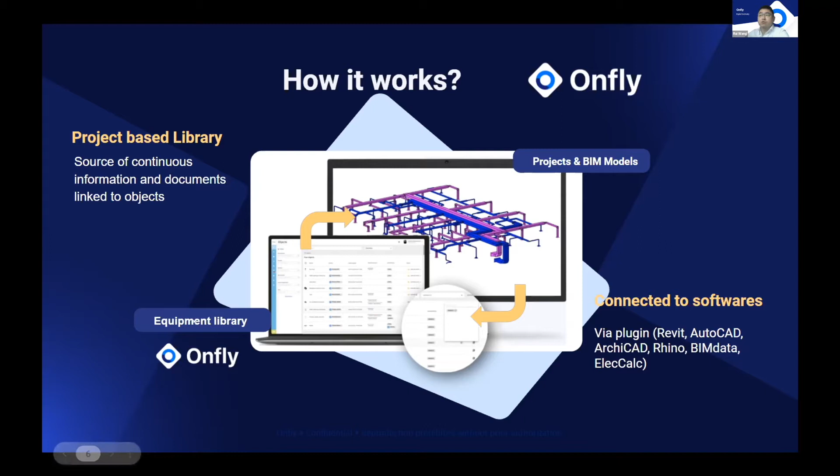So that means this project-based library, it's for all your BIM objects. We centralize the BIM objects, but not only the family files, geometry, but the information and documentation. So Onfly actually, it's a web cloud-based application. We are also offering different connector plugins, probably with Revit, AutoCAD, ArchiCAD, Rhino, ElecCalc - it's electrical calculation software - and BIMData for today's use case. So BIMData is also a SaaS cloud application, and you can integrate and visualize your 3D model directly online and share information. And we also connect with Onfly to share documents, information, etc. This is a use case we are showing today.

So how can Onfly help to do the information management? Why do we need to set up Onfly? What's the concept of Onfly? Actually, the problem from AEC today is, if you are doing a model for the project, you maybe have multi-source information for your model. So you maybe need information from the architect, and you add new information for the construction side, and you need to deliver other information for the client. So the client needs to add new information, documents for the maintenance, operation, etc. So a lot of information needs to be enriched between different steps and different stakeholders. So how can we make sure that there's no information lost between the different project stages during the exchange? That's why Onfly is here.

So with Onfly from the cloud, you can consider this as a common database that can centralize all your BIM content. And even when you are doing exchanges, you can transfer the information from Onfly to different stakeholders. So why do you need Onfly instead of directly transferring information from the model? Because you may be using different software formats, speaking different languages, using different standards from architect to construction, and you need to deliver or submit a model to different departments, each needing to adopt a different standard. So with Onfly, the concept is it's a common database that can handle all the standards, even the language and software format.

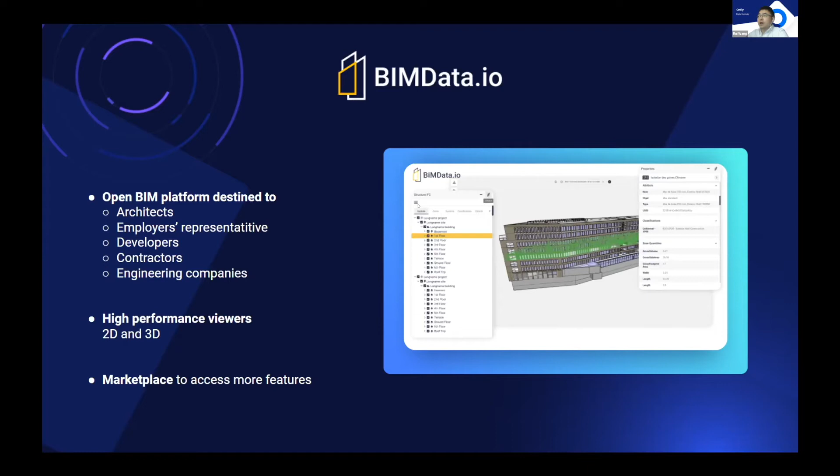Okay, so just for information, I will do a short demo presentation about BIMData. BIMData is an open BIM platform for all the stakeholders: architect, employer, developer, contractor, engineering companies, etc. So simply, it could be used as a viewer for your 3D model and 2D drawings, making sure everyone can access the model and the information. We'll show you a use case later by a demo.

So here's some challenges about construction that BIMData can help to meet. It's about IFC exports. Actually, if you export IFC, many information could be lost during the exchange, and the BIM model are hard to update without modeling software. So you need to open Revit, enrich information, and transfer the model and export IFC maybe.

And also the manufacturer data are fragmented. So if you need manufacturer data, it's difficult to contact the manufacturer and difficult to enrich into a model, and the lack of linking documents could be difficult. And also retrieving product documents for as-built documentation - so finally, the digital as-built documentation are no use.

So for this use case, BIMData is helping you to resolve all these questions. So about the data - really reliable and also easy to update via a database. The database could come from Onfly, and high quality data is drawn as required, and digital as-built documentation export. So at the end, you can easily, with one click, export your as-built document directly sent to your email, and you can directly view from your drive. I will show you later.

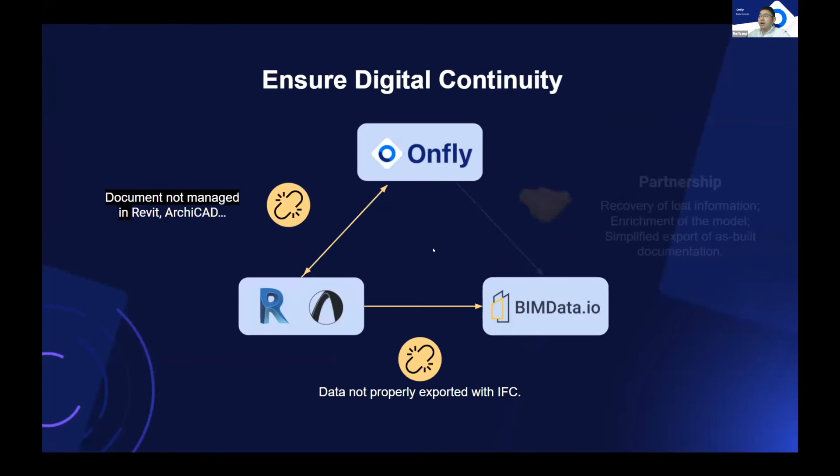Let me start a demo of Onfly. I will show you two small use cases of Onfly. First, it's about centralization of content. And second, I will show you a project use case about data harmonization, structure, standardization, and documentation management.

So it depends also on your maturity, as Onfly is really a private library. For each project or client, we have a private URL, and then you can invite your users to access your private library. So you can invite by email, and you can define them different role access.

So once you invite your user, let me show you - you already have some content published on your library. So as the end user, you can also access your library with a Revit plugin. Here is my Revit with a BIM&CO plugin. So the user can log into their Onfly space, then click add file, and they will access the Onfly space at the same interface.

Hi, good morning. I think Stan. Yes, I'm here, sorry about that. We've got a power cut where I live, so I'm on my phone right now. I'll be able to do the demo with no problem, but sorry for not being on time today. No problem, I'll just finish my demo and give you control to do a short presentation and the demo. Okay, great. Thank you, Stan, that's great.

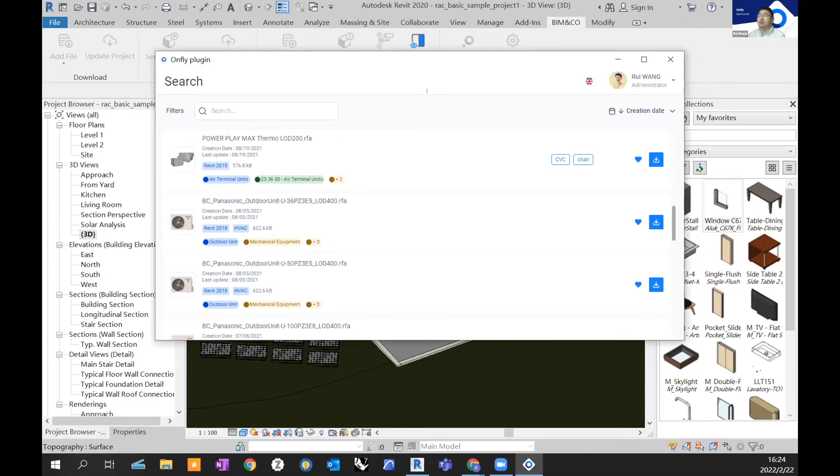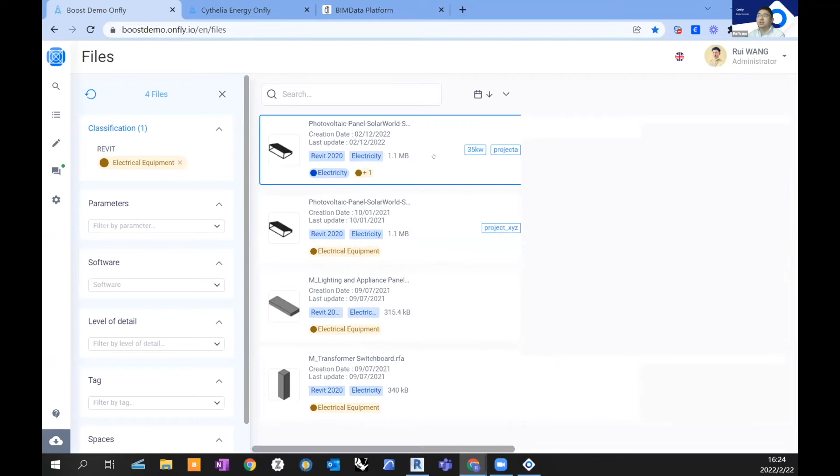So you can see the Onfly interface accessed directly from the Revit plugin. Let me show you how it works with a filter. For the end user, they can easily search an object by the classification. For example, you have a Revit category - you just need to click the right category, and you can access the family and visualize all the content inside your family.

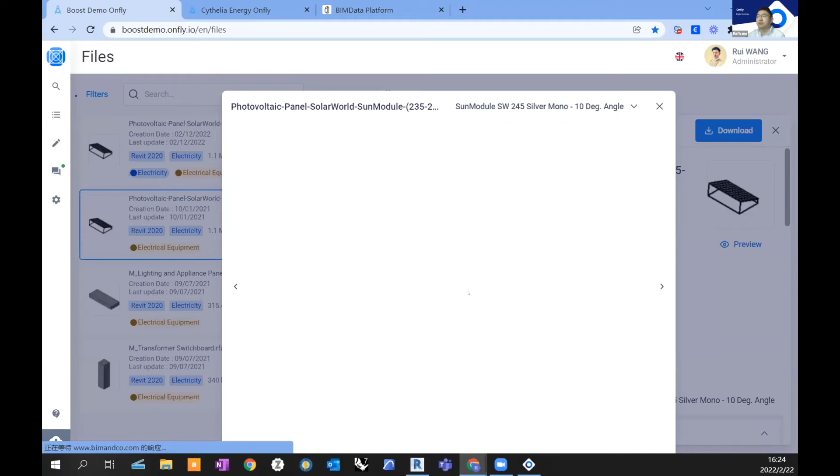Okay, so directly in the Onfly application, you also have a 3D preview just in case you want to check the geometry of this family. So you click the preview, and there will be a 3D viewer model generated automatically.

There's more filters to help end users do efficient searches. For example, they can filter by parameter, and they can filter by software format. If you have different versions of Revit, they can also filter by tags - so you can add tagging to your family, and use the tag to search your family.

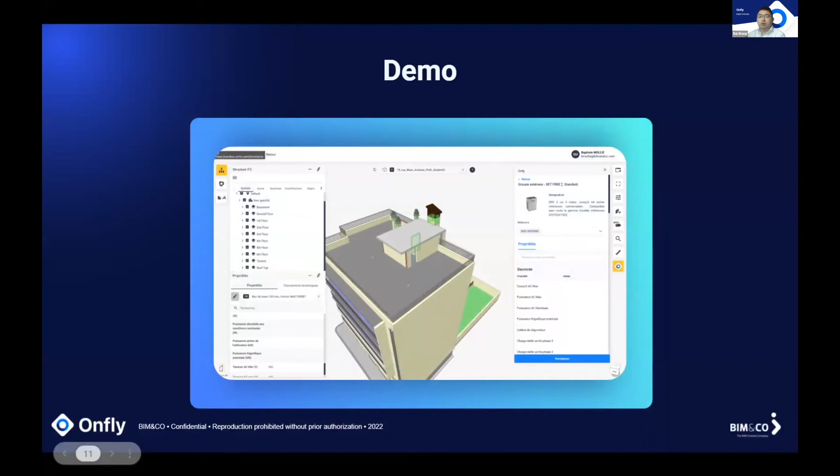Okay, and how to download an object? I'm showing from the Revit side - you see this plugin, so you can directly download this object into your project.

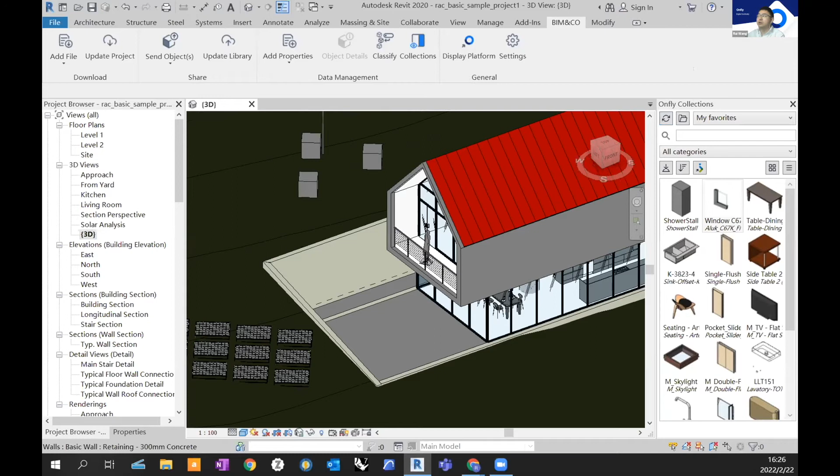But another efficient tool we are developing is a collection panel, where as a BIM manager, you can actually define different collections as a group of your families or a file list. And the end user can synchronize all the content directly in the Revit panel - they only need to drag and drop to reuse the content. Okay, for example, for this window.

They can filter by different category, search by name, and use drag and drop to reuse the family. So this is how with Onfly we call it the Onfly Boost, to centralize your content directly online for easy search and easy download.

For today's use case, I'm showing a real project use case: the project named Cythelia. With cythelia.onfly.io, you access the project library, where there's another view named objects instead of files.

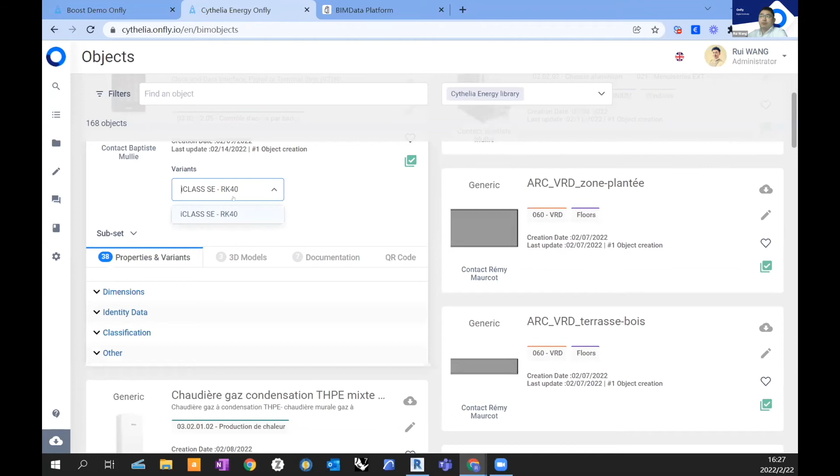With objects you can see more information: the different type and all the information for an object. You can also link different geometry or LOD to your object, and document an external link or any kind of file, PDF or Excel specifications, to integrate into your object. Then with BIMData, we will show you how we can deliver this.

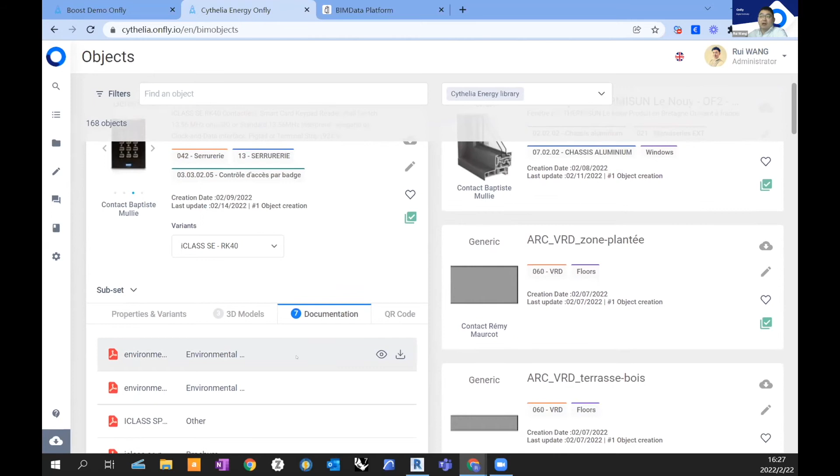There's also a QR code, which means for operational maintenance you can directly access the object view. And for the use case of managing your BIM content, you can directly edit this object online without any BIM software.

For example, for properties, you can add new properties or parameters directly online without Revit. You can even enrich maintenance data or information, for example some text, new information directly online.

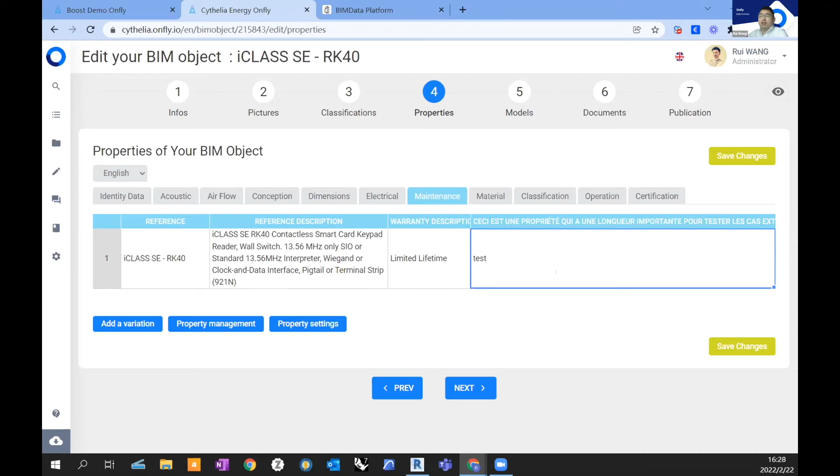Once you enrich this object online, there will be a new revision created for this object. Then from the Revit side, if you already use this object in the project, you just need to click update project. The plugin will help you compare the different revisions and update the new information, type, or parameters directly into your project.

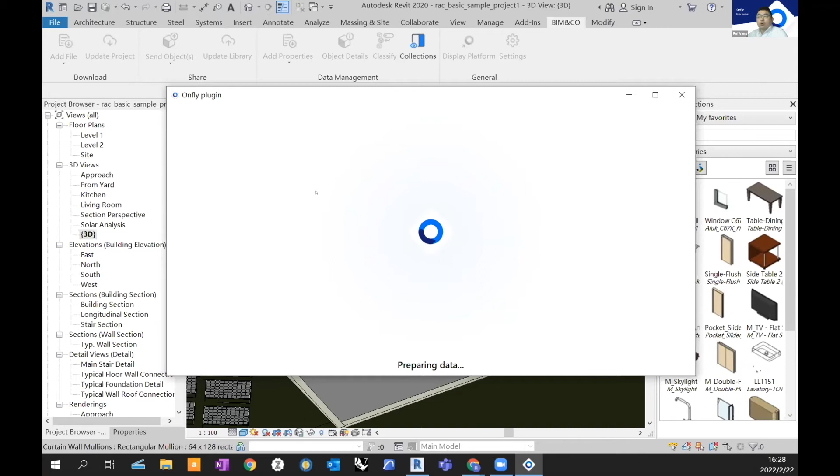You can see a list of the new revisions of your families. You just need to select and do the update.

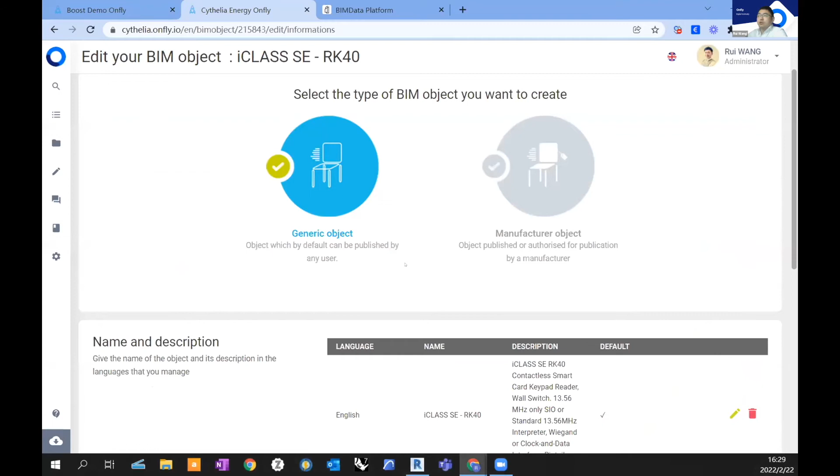Before I hand over to Stan, I'll show you something you may be interested in: the property. All these properties you can define in Onfly with the dictionary. Actually all these properties are shared parameters, and you also have a classification that could be very useful. For example, you can define your own classification for your project, and for the Cythelia project, I'm creating a new classification.

What we can do more is integrate some mandatory properties into your class from the dictionary. That means for each object classified under this classification, they will automatically add all the mandatory parameters.

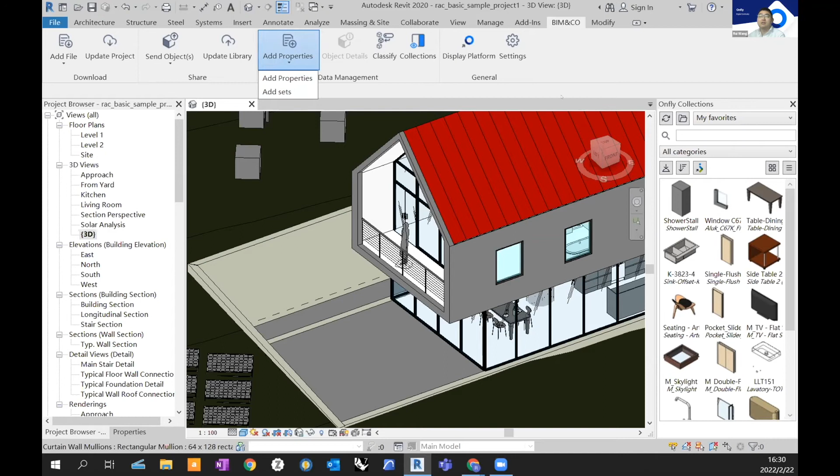Otherwise, you can also enrich parameters directly from the plugin on the Revit side. You can add properties and massively select your families, and directly add shared parameters into your project.

Last, I can show you about the document. Actually, for each object you download into your project, we keep a GUID link, a dynamic link. So from Onfly you can add new documents and also new models to link to your object.

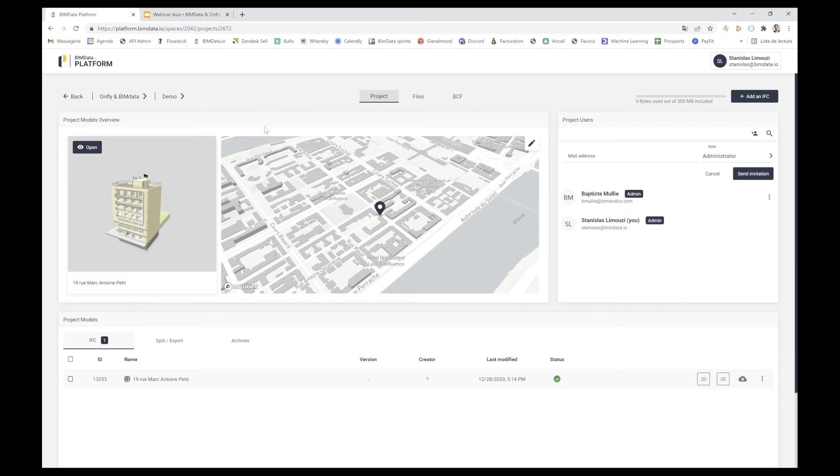So then, if I move on to the viewer, this is where we've been integrating the Onfly plugin. This is what you would expect from a 3D viewer. You have all the structure from the spatial data, the zones, the system, the classification, and the IFC object.

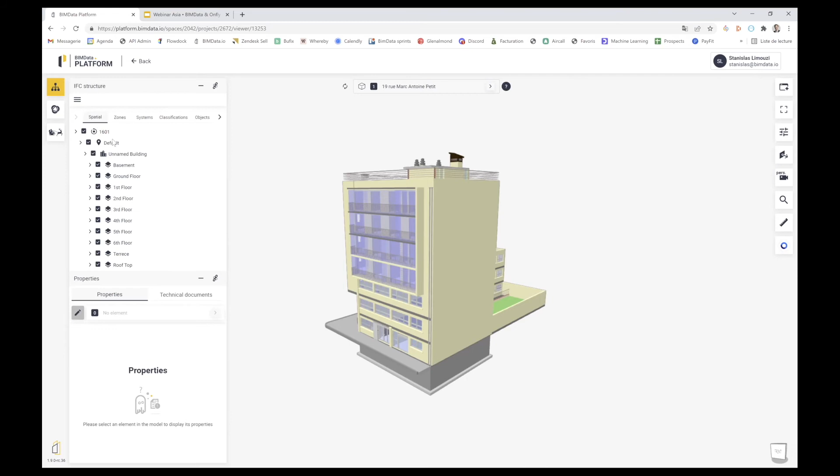We've added layers as well, which can be helpful. You can navigate from those different trees. If I give an example here, you can select different parts of the model.

You can select windows, for example, and this is where you get all the information on the left-hand side from the attributes. The interesting part is when you do that, you can add information from the Onfly plugin.

So this is where I'm going to select one of my containers from Onfly. I'm taking Cythelia Energy, which is one of the projects we've been working on. Here I can see all the products or objects that you've been managing through Onfly.

So if I want to see any of this product, I will get all the properties from the product. So this is a Kingston lavatory. On top of the properties, there are none in this example, but I can also get the documents you've been adding on the Onfly platform.

By managing all your products on the platform, you will be able to fetch all of them in a very easy way by just typing the sort of product you are looking for. So you can basically type and search.

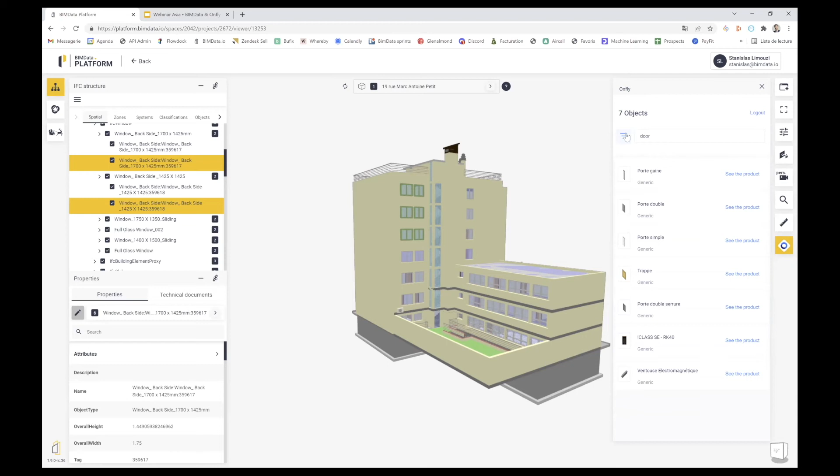So if I type 'door', I will have some information about different products, like this door, and I will get the information again on the door. But there is a smarter way to look at, to search for the product.

You can use the classification you've been using before. So if I go back to, for example, a very specific product, I think we've seen it on your demo, Rui - this is the switchboard here.

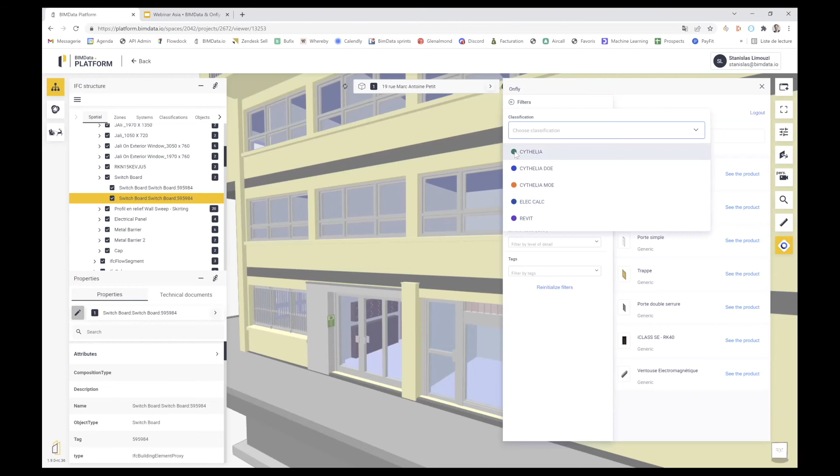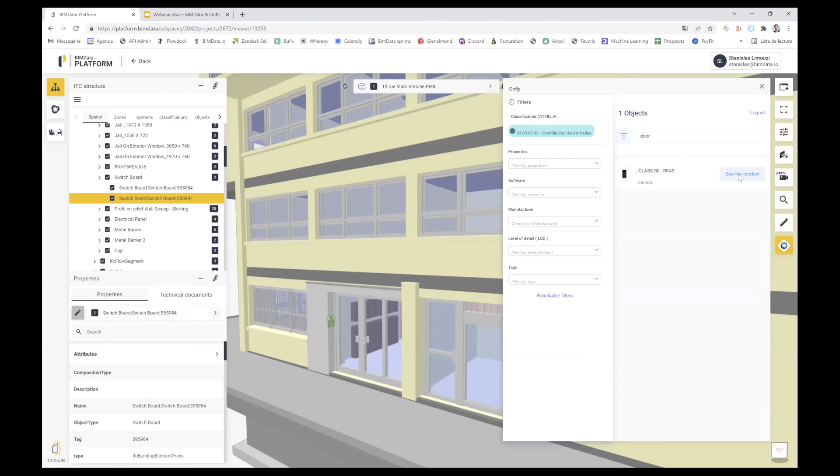If I was looking at the classification, I will go to the electrical part, and then - this is in French - looking for the access, the control access for the building, and then I'm getting the product we showed earlier on, which is an iCLASS SE, and I've got all the designation, properties, and documents.

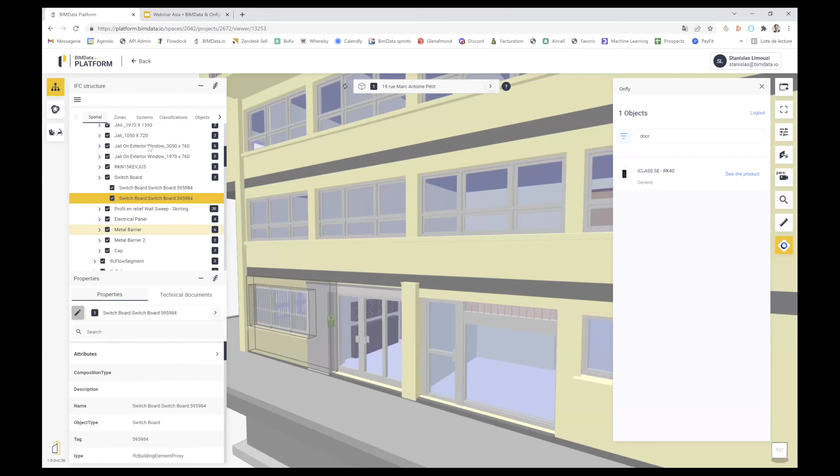Now I've got the possibility to basically just replace the current data, and when I do that, I'm going to replace the data and update, get rid of all the wrong data and get all the right data in from Onfly. And if I do that, there's different types of product.

I can do it as well. This time I'm not taking this filter, but I'm using a tag. This is another way of looking for a specific product.

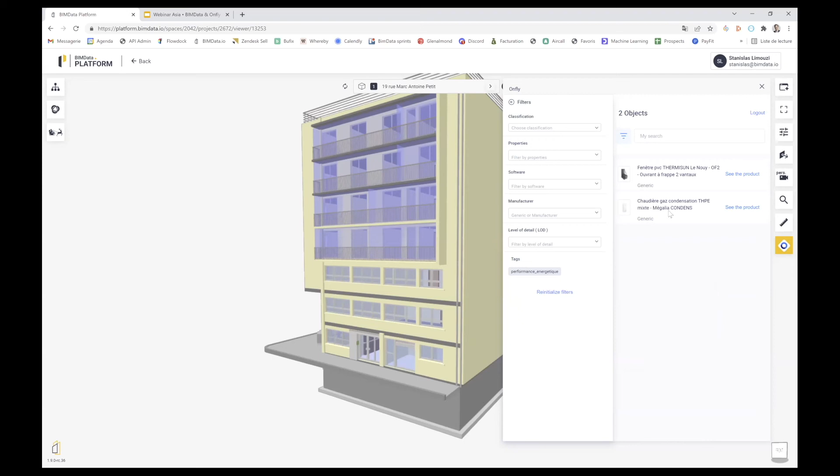If I look at a tag with all the products in the building that's going to be impacted or impacting the performance - basically the energy consumption performance - by clicking on the tag and filtering by it, I've got two objects: the windows, and the heating system, both tagged with that information.

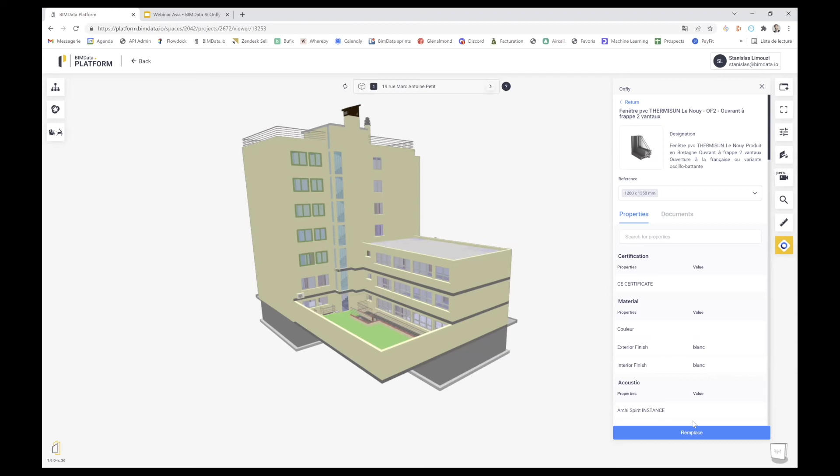So if I click on the windows again, I'm going to see - say this is the right product. I click on the windows, and then that'll be enough. I update the information, and now what I can do, if I split my screen here, I'll go for a vertical split, and I can do it here.

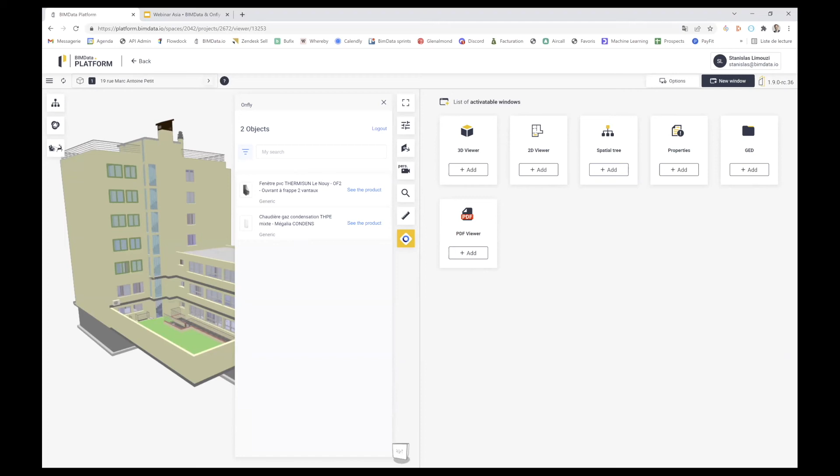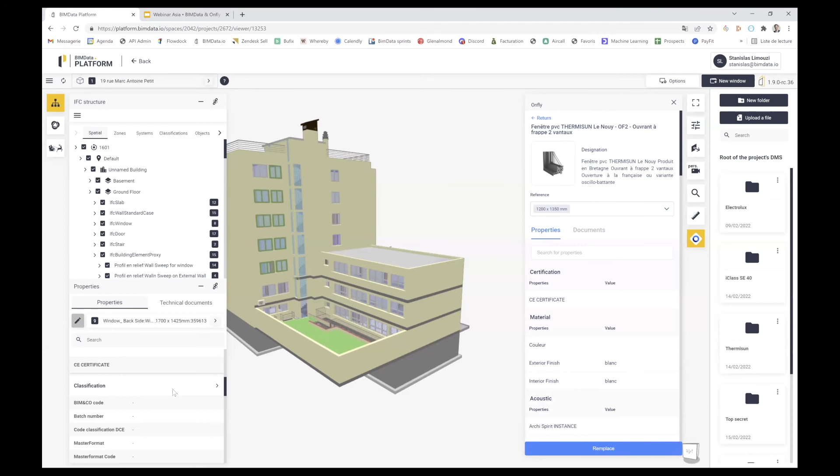What I can do is look at the windows, look at the properties, and I will get all the information - the name of the product, Thermisun - and I've got all the data here, plus all the technical documentation that could be added on the windows. If I click on the info, I'll open another window and get the info from the product.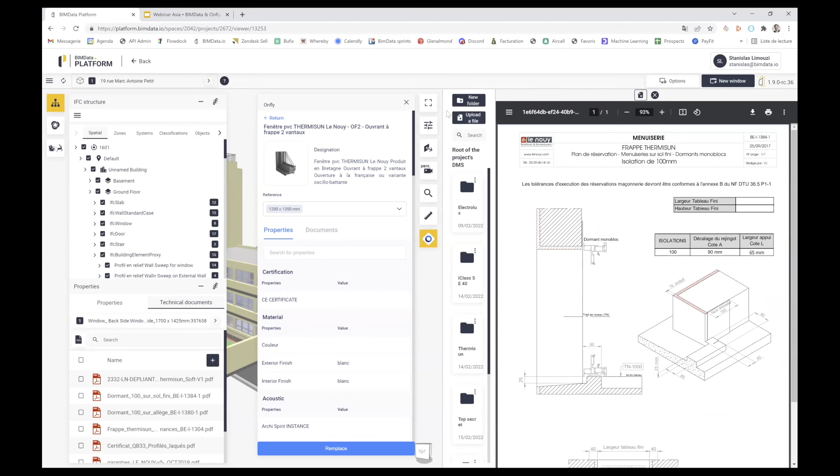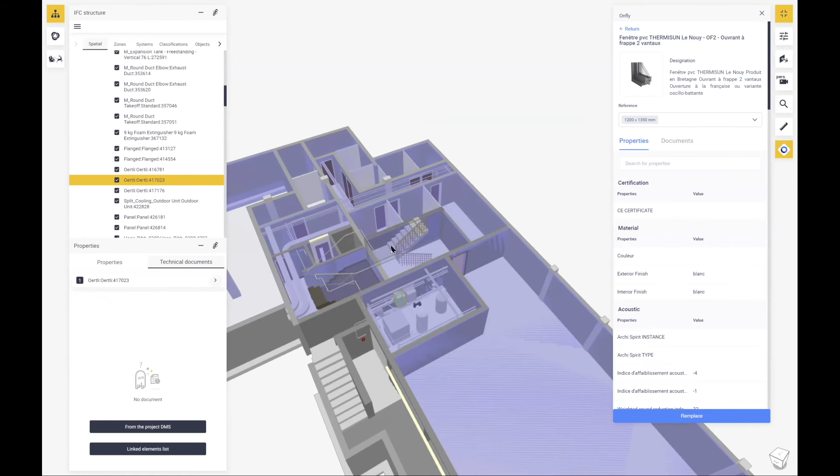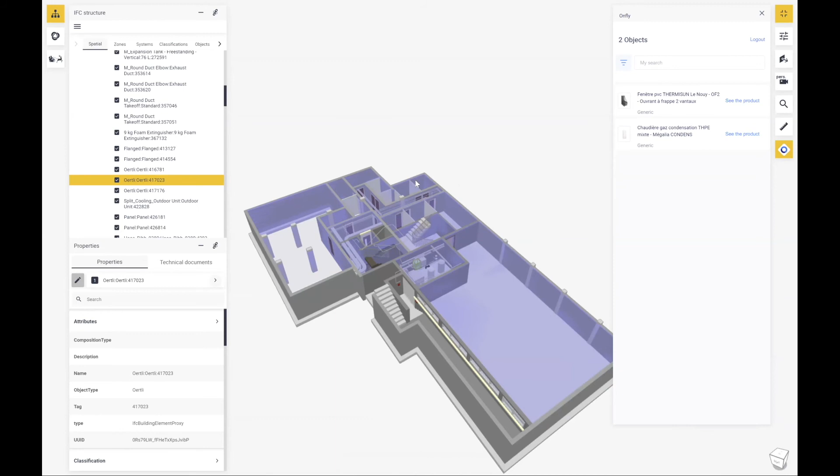So what you can see here is that by using the Onfly plugin, we've been able to update data really quickly. I could also use the spatial navigation to find or select some of the products very quickly. And if I go back to the heating system, you can see I can click and find the different products, replace them, update the data, update all the documentation, and make the link with the model.

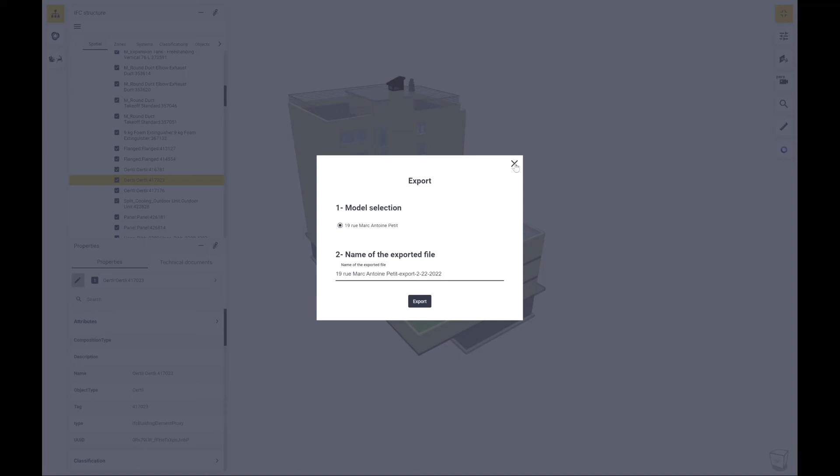When I'm done with the updating of the products and the model, I can do an export of the IFCs. By default we put the date, but you can put the version you want and the naming you want, and basically you create a new IFC with all the data integrated into it. So this is really what this is all about - being able to have the data centralized, making sure the data is accurate, and being able to update all the models during the lifespan of the building.

And then finally, what I can do is export the documentation - the handover and as-built documentation that has been integrated into the model.

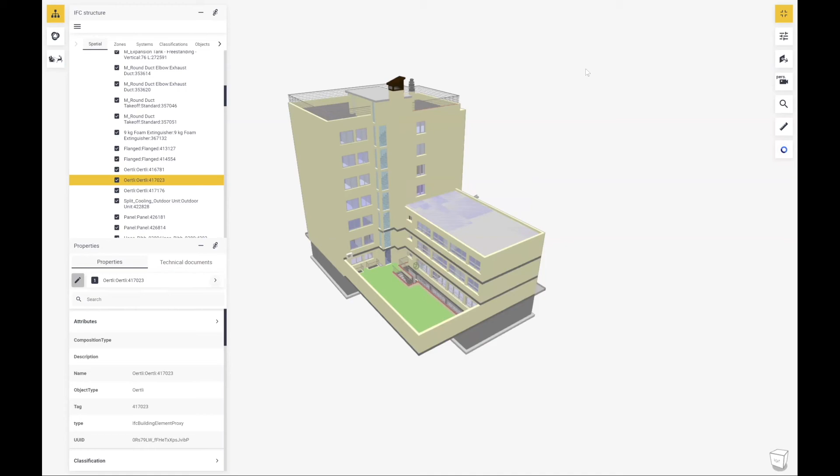So what I've just done here is make the action so that Onfly will flag all the data that has been updated into the model, and then I'm going to receive a mail. It's pretty quick usually, so hopefully I have it. Okay, so it should be on its way very soon.

When I have it, I'm going to open it, and then I can download all the data from the handover phase - the last data drop of information. Oh, I didn't confirm that, so I need to click confirm for the export. That should be working well.

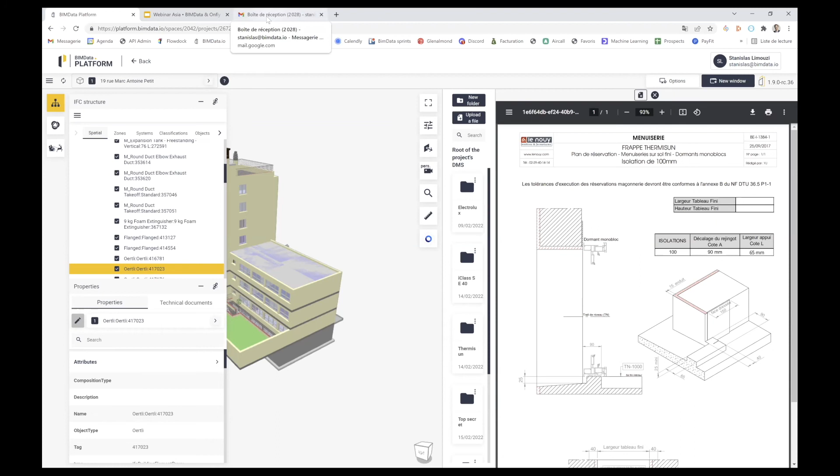As you can see, and this is really the important part, what we like about Onfly is that we have the 3D model, we've got the accurate data and the accurate technical documentation as well. So basically we have the geometry, the data, and the document, which is really what you want at every data drop that you do during the project.

I've got the email now from BIM&CO. Can you see my screen still? Okay, great. So basically I'm downloading the file and I'm going to open it.

So basically you see what we get. But it's a bit slow. Yes, we can see. Your sound is more quick than your screen.

So basically, I've just downloaded the data from the heating system, the windows, and the control access for the door - I'm not sure how you call it in English. You get all the documentation very well structured, which you can pass on or keep for the operational maintenance phase, for the maintenance team to maintain the building properly.

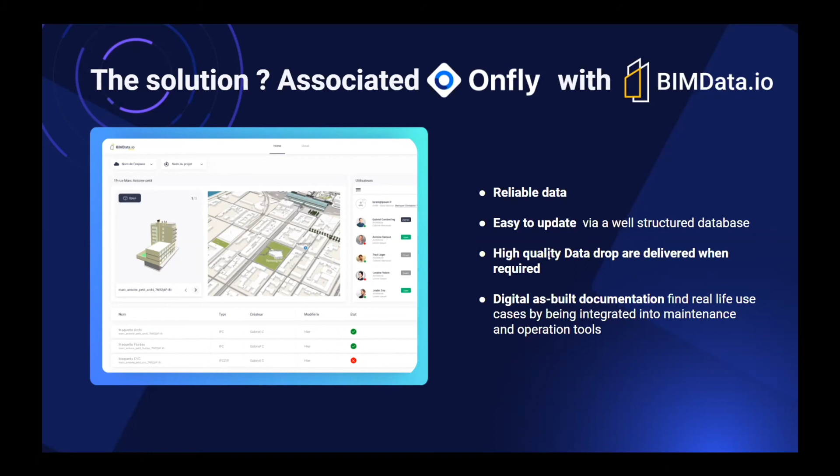Just to brief our presentation and demo, so you can see several benefits about this integration, access your demo with a simple browser. Onfly and also BIMData, it's a cloud-based application with a SaaS subscription, and retrieve information and documents from modeling software. So you can enrich any documentation without modeling software, but keep the dynamic link to documentation, BIM model and BIM object especially, and update information as well without modeling software.

Actually, there will be more use cases we need to show. Due to time, we don't prepare a more complete demo. But if anyone wants a trial or special demo, just contact us.

So just before we launch the Q&A, I'm showing the different offers of Onfly. We have 3 kinds of offer depending on your maturity or your requirement. Firstly, a boost is about file centralization. And what we are showing during this demo is the smart offer, which is about data, documentation, etc.

If you want to develop your own integration with your facility management or CDE software, you can have the connect with API connector, with analytics, with also a sub library. So that's it, Onfly offer.